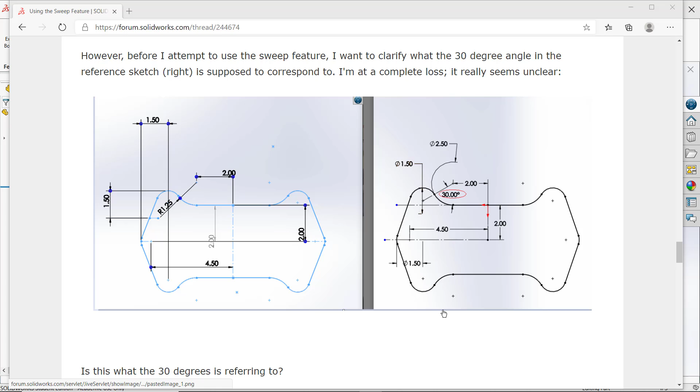In today's episode of Doodling in SolidWorks, let's take a look at how to do this design. At the beginning of the thread on the SolidWorks forum, we're given this view and this view.

So here is an attempt to do the original sketches. Notice that there are no black lines. Maybe there's a black line under there, I can't tell. But you should always fully define your first line, rectangle, circle, or arc that you create.

Always look for symmetry as well. In this original design, the origin is placed up here, but there is a lot of symmetry between left and right side, and also symmetry between top and bottom. So we have two directions of symmetry in this design, so it would make sense to put the origin at this location right here.

That will really pay dividends later on in more complex problems, particularly in assemblies, and particularly in assemblies with motion analysis, where you can use the origin planes, or create origin axes, to define a location of geometry which is absolutely robust, referred to as the BORN technique, base orphan reference node.

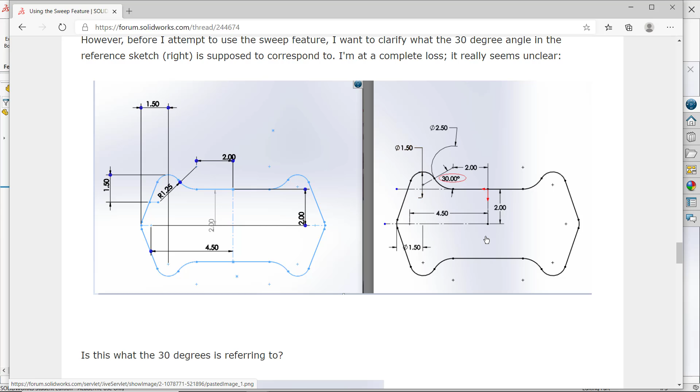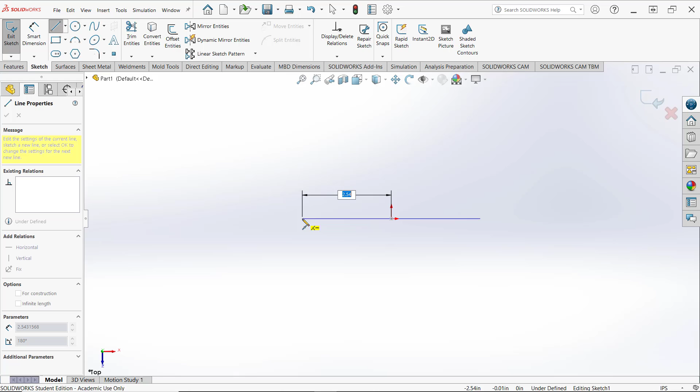So let's look at how to set this up. I'm going to start a new sketch on the top plane, and I'm going to use symmetry about the origin. So I'll draw a midpoint line from the origin, and come over here and put in a distance of 4.5 as that length.

Let's go ahead and dimension that. So let's dimension it from here to here as 4.5. That line turns black—it's fully defined.

I'll also draw a midpoint line going from the origin going up. Again we have symmetry, so we can dimension from the origin up to this point as 2 inches.

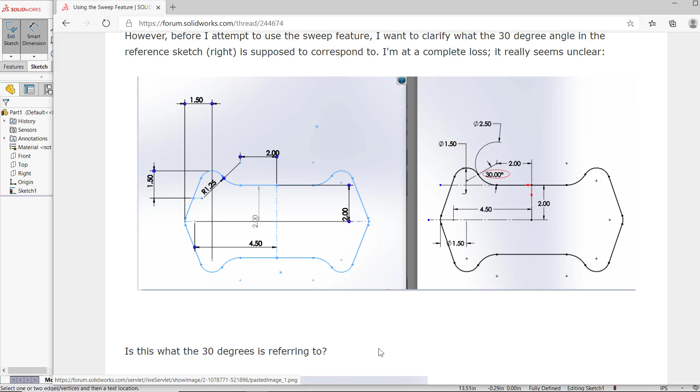I forgot to mention back at the beginning of the video, you should stop here, stop the video and see if you can reproduce this on your own in a logical and efficient technique, and then restart the video and see how I'm going to do this.

So I have the 2 inches from here to here. I have the 4.5 inches from here to here. I'm going to put in this line up here, and we'll continue.

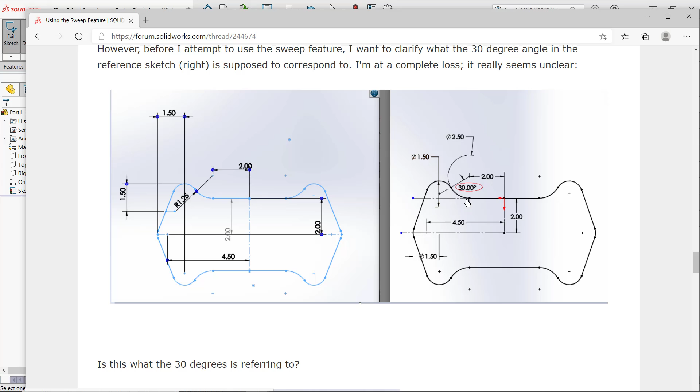Now look at this. If this arc is tangent to this line, which we can assume, then this distance from here to here is 2. So we can either dimension this line length from here to here, or we can dimension the center of the arc.

So I'm going to then change these two lines to construction. I'll get out of the dimension command, crossing window select those, and change those to construction.

And then I'm going to draw a midpoint line up here. So again I'll do a midpoint line, and come over—remember I said I don't want that to be construction. I said that I could dimension this from here to here already, but we'll do it the same way it was on the original.

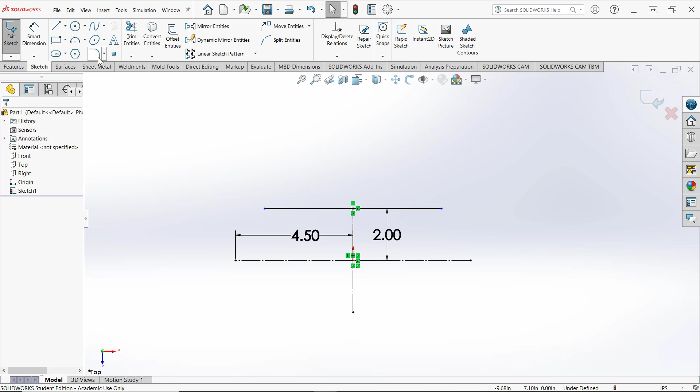In that respect, I will do a tangent arc from here, and then there's going to be another tangent arc coming off of that arc, and that will come around like that.

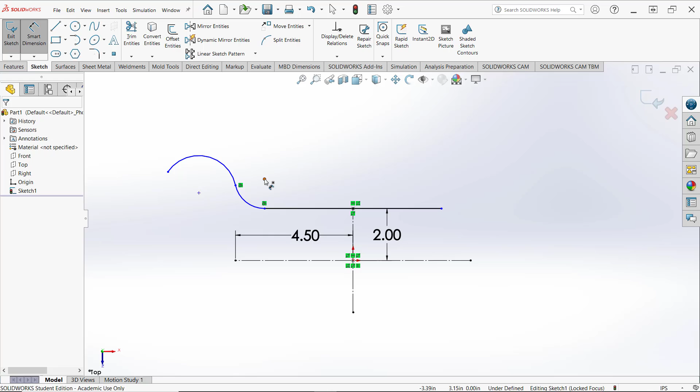And so we'll go ahead and put in the dimensions for that. The dimension from here over to here was 2 inches, and then there is a 30-degree angle from the center of this arc to the horizontal.

So let's do a construction line from the center of this arc over to the center of that arc, and then we'll put in the dimensions. So it is 30 degrees from here to here. We'll go ahead and put in that 30.

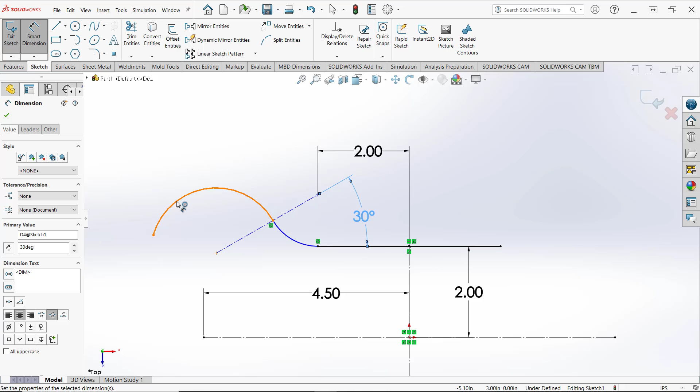And then the radius of this arc is 1.25, and notice that turns black, and then the radius of this arc is 0.75.

Now on the original, this was given as a diameter. When I have less than a full circle, I prefer to dimension it as a radius rather than a diameter.

If you have trouble doing the math in your head, I can have SolidWorks do it for me. So I could say this is equal to 1.5 divided by 2, and SolidWorks will do that math for me. Notice it puts the summation symbol there, letting me know I've done a calculation there. If I ever want to go back and see where that number came from, I can go back and see the equation that was used to create it.

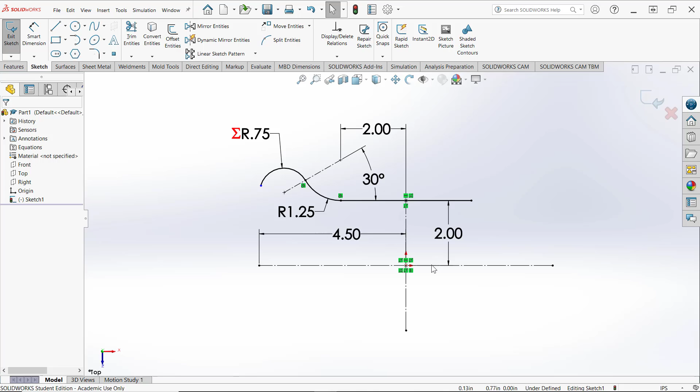Notice all of this geometry so far is black, no blue geometry except for the end of this arc right here. Now we could use dynamic mirror entities and create both sides of this at once, but for beginners that's probably a little bit complex, so I'm just going to do this and then mirror it myself.

So I'm going to draw a line. I'll come down to about here, move my mouse away, come back to it, it changes to the arc command, and I'll put an arc about like that. And I'm going to mirror this stuff to the other side. Now I see a tangent here, but I don't see a tangent up here, so I'll crossing window select those two.

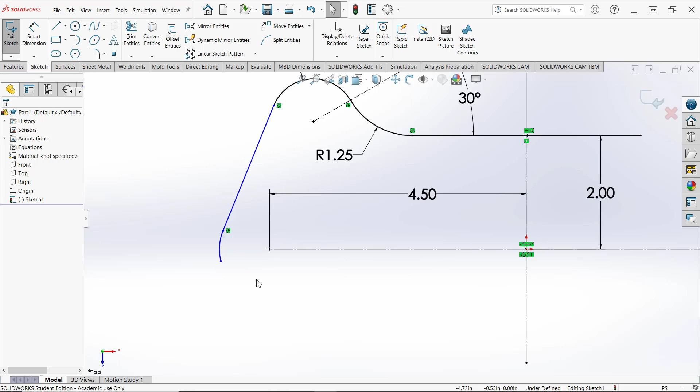I'll add that tangent relation, and then this point right here should be at this point down here, so I'm going to drag that down here. I might have some trouble dropping it, but I'll try to drop it on that point. If I have trouble getting it, I'll select both of those with the control key and merge those together. Okay, now those two points are merged, and I'll continue putting additional dimensions or relations.

The radius of this arc is also 0.75. Now we could make this equal or dimension it again. If there's a chance we may change the size of that, it's probably best to put in a dimension, but if we always know those are going to be equivalent, we could just make these two arcs equal.

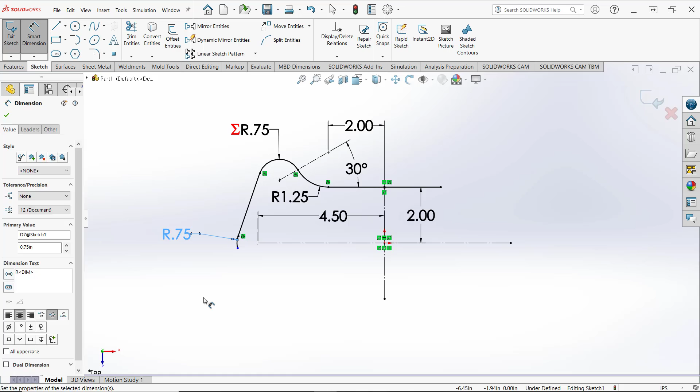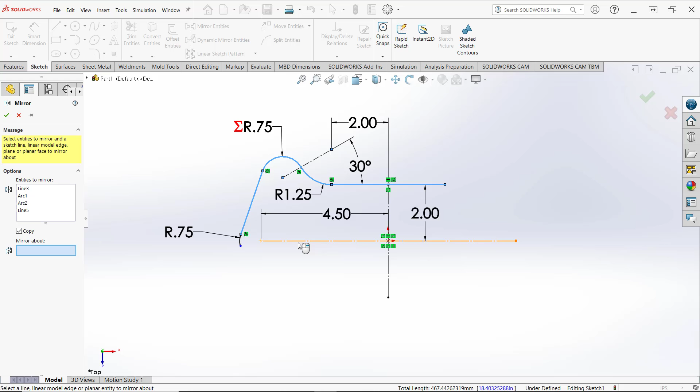I'm now going to mirror much of this geometry about this line, so I'll do mirror entities, and I'm going to select this line, this arc, this arc, this line, and I don't want that arc. I'll mirror that about this line, and I got the wrong one there. I meant to click down here, so I'll clear that selection and come down here, make sure I get that highlighted, click down here, and say OK to that, and that's fully constrained.

Now I need to make sure these two points are tied together, so I will control-select these two points and merge those together. Alright, so now I've got everything on this side done.

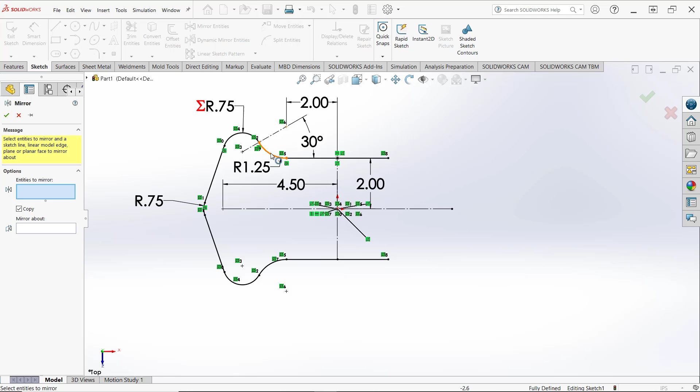I'll mirror the stuff over to the other side, so I'll do mirror entities again, and I'll select this arc, this line, this arc, this line, this arc, and this arc, and I will mirror about this line. We'll say OK to that, and it's all fully defined.

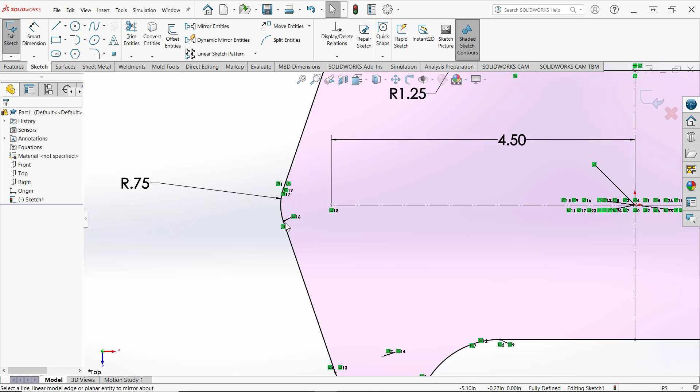Now you might want to—I've turned on shaded sketch contours. You might want to turn that on and make sure it's in fact fully enclosed, that there aren't any gaps. Remember that little gap we had there originally on that arc? I had to close that gap. I prefer to leave this off, but just for beginner use you might turn that on.

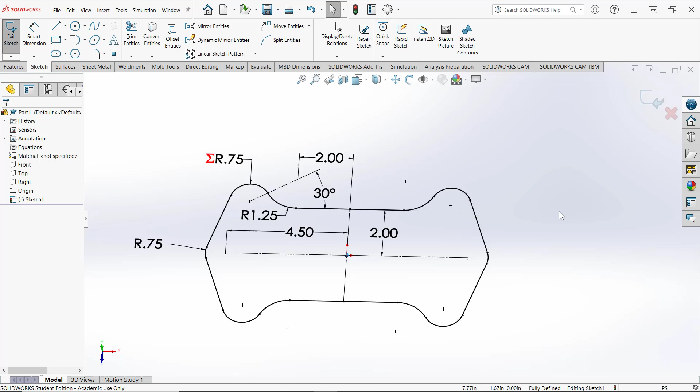And I tend to turn off the visibility of these relations too. After you become familiar with SolidWorks, you know what relations it's putting onto your geometry, and if you ever want to check, you can just click on the geometry and it'll show you the relations on that geometry. Alright, I'm finished with this sketch, so I will click Finish Sketch.

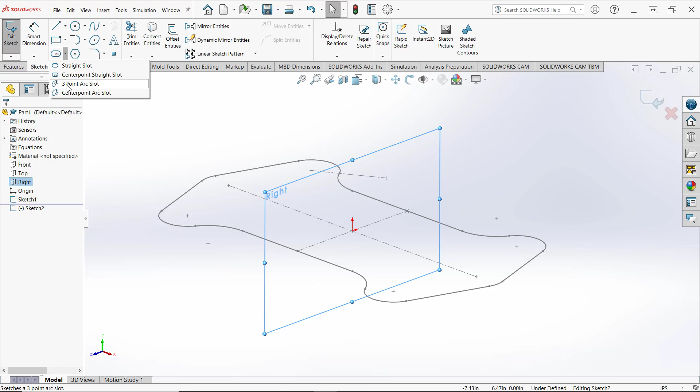Then using the Born technique, where I only create sketches on the top, front, or right side plane, I'll do a new sketch on the right side plane, and I'm going to do a slot, so I'll select a 3-point arc slot. My first point will be the end of this line, my second point will be out here in space someplace, my third point will be about like that, and then I want to come out with some width to that slot.

Now let's look at this from the right side view, it'll be easier to see. And so then we want to dimension this arc, and because this is not a full circle, I'm going to dimension it as a radius.

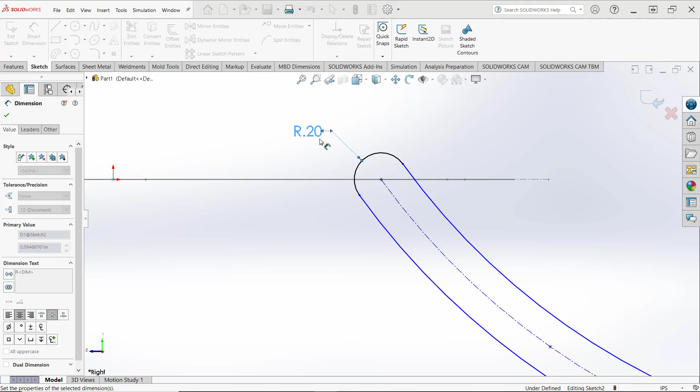The original design was given as a diameter of 0.4, the radius 0.2, and so that arc turns black. The distance from the origin down vertically is 1.5.

In the original drawing that was put over here, so that you can follow along with what I'm doing, I like to put the dimensions in the same location. So then this 4 inches was given as a diameter, the center from here—be careful—from here over to here, so I'll do that as 2 inches instead of the 4 inches.

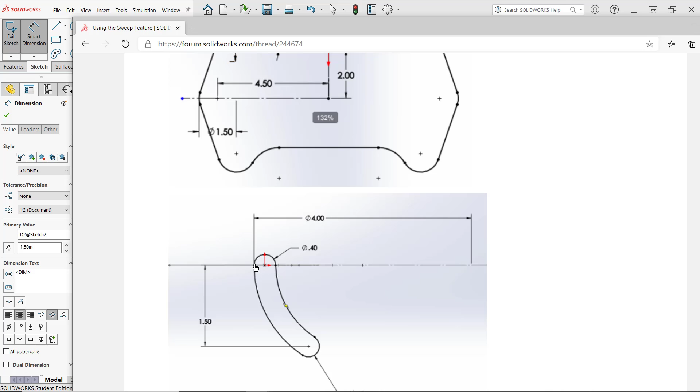And so the center of this arc should be horizontal, and then 2 inches from here over to the edge, not to the center here, going by the drawing. Alright, so I need to get this point up, or this point down, so that I'm in the dimension command. I need to escape, get out of the dimension command.

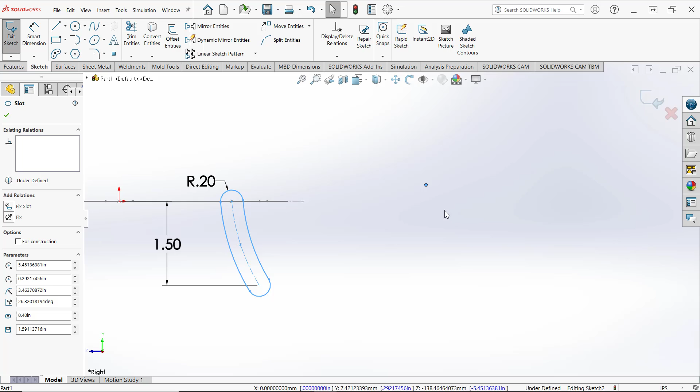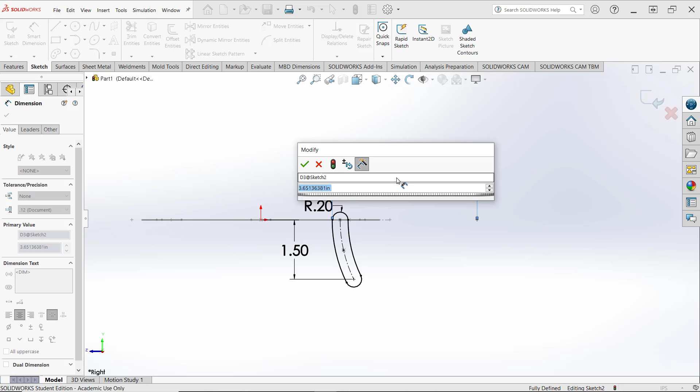So the center of this arc should be horizontal with the origin, and so I will set that to be horizontal, and then I will dimension that distance and do it from here. The original drawing didn't go from here, it went from here over to here, and I'll put that in as 2 inches. For some reason they did that as a diameter of 4. I'm not sure why. Notice it turns black.

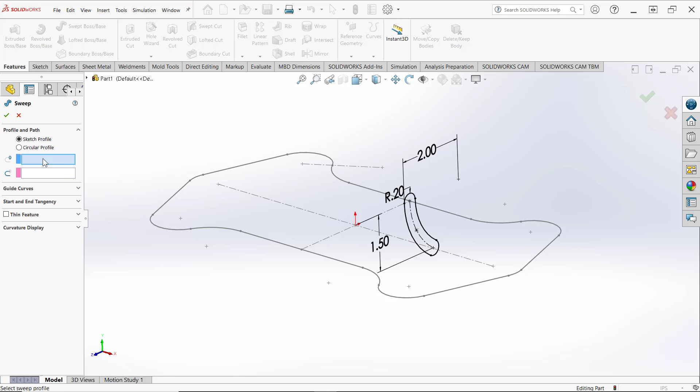It's all fully defined, and so we're ready to sweep our geometry. I'll go into the features and do a swept boss base. I need to select the profile, so I put my mouse over here to see what it wants. It wants the profile. I'll select this as my profile, and then it asks me to select the path. I'll select this as the path.

It goes all the way around that path. I have a closed path. I'll say OK to that, and so there is our geometry.